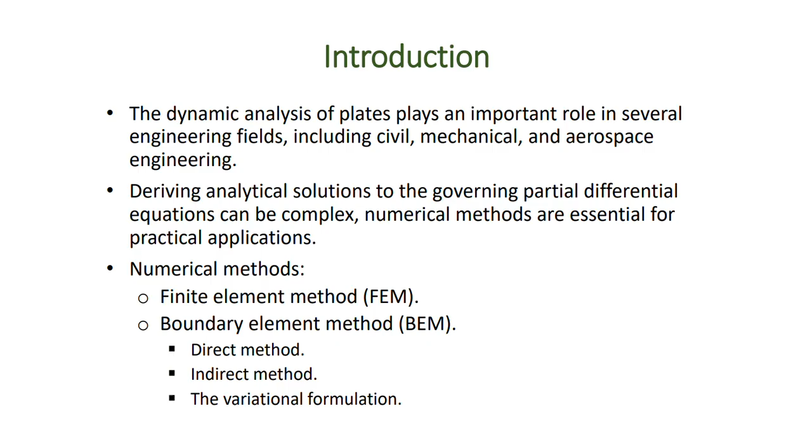There are three types of boundary element method: direct method based on a virtual work principle, indirect method based on the classical superposition, and variational formulation.

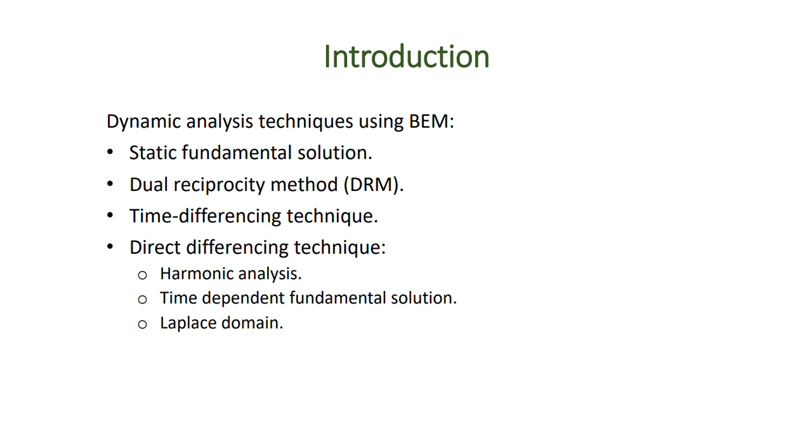There are many dynamic analysis techniques using boundary element method, such as static fundamental solution, DRM, time-differencing technique, direct differencing technique, harmonic analysis, time dependent fundamental solution, and Laplace transform.

The proposed formulation focuses on treating the involved plate as a single element. A boundary integral equation method is used to form stiffness and mass matrices for an arbitrary shear deformable plate in bending using an innovative technique. Hence, those matrices are used to solve the dynamic equation of motion.

This formulation is considered for free and forced vibration. The developed technique involves boundary discretization plus few internal discretization to define mass and measurement points. Several numerical examples are solved to demonstrate the accuracy and the efficiency of the present formulation.

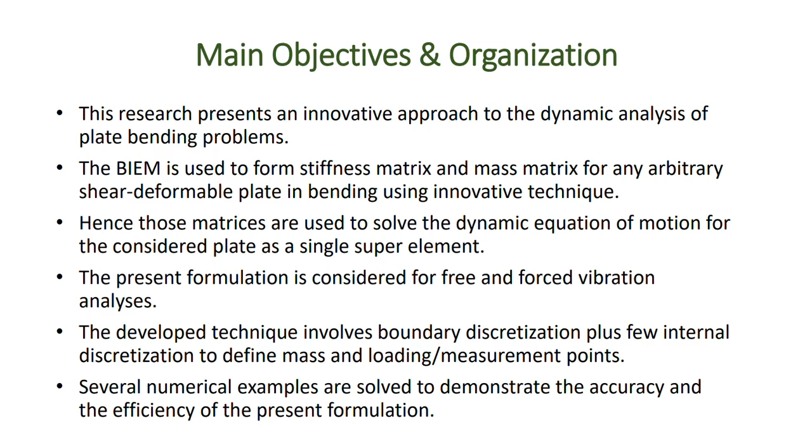To perform the proposed dynamic analysis of plate, it's necessary to extract stiffness and mass matrices using boundary integral equation. This process begins by defining the degrees of freedom inside the plate domain. These degrees of freedom are postulated at least at the loading and the measurement points in case of forced vibration.

Whereas in case of free vibrations, these degrees of freedom are postulated at places where certain modes are desirable to be obtained. Despite these facts, other degrees of freedom are sometimes necessary to have a consistent representation of the plate mass.

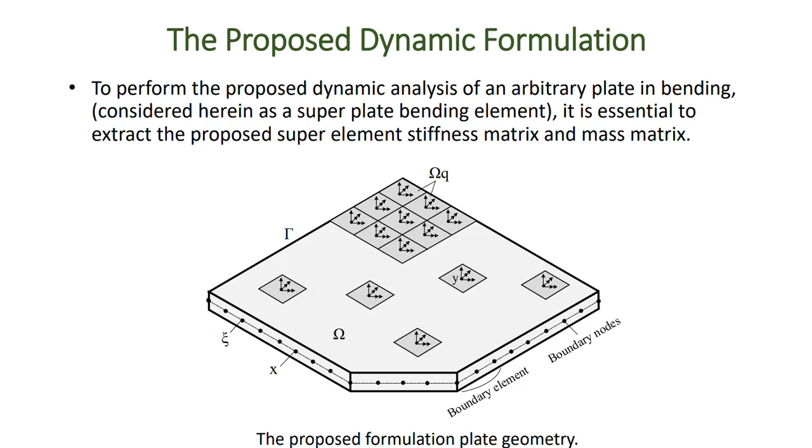Three ways of postulating degree of freedom are proposed. The overall domain is discretized into cells, or part of the domain is discretized into cells, or defining degree of freedom at small cells or points.

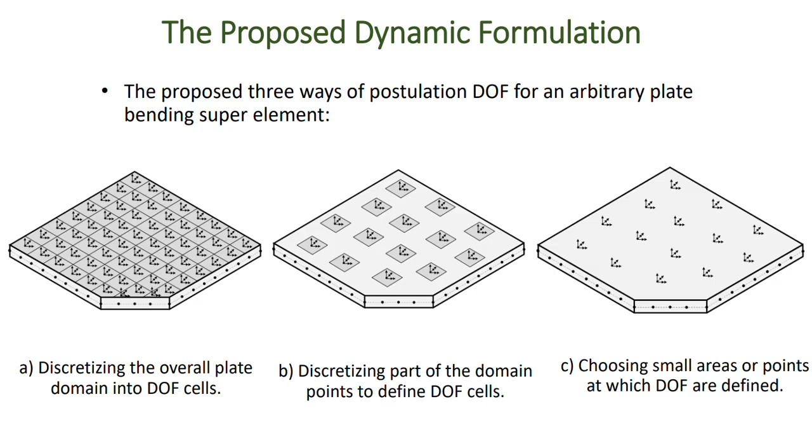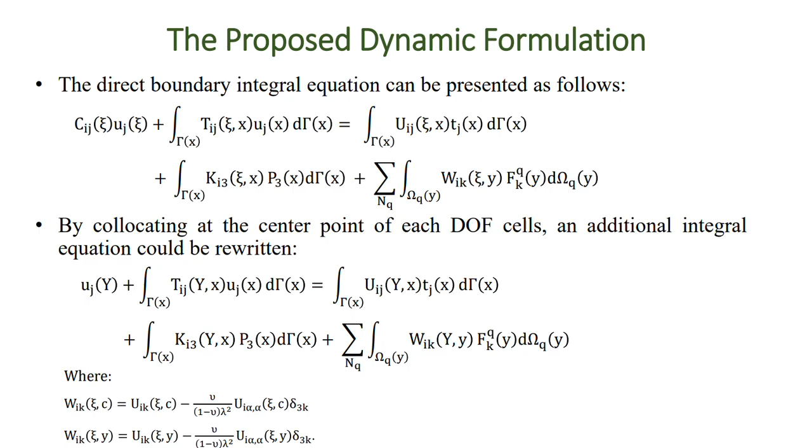This is the used direct boundary integral equation. Noting that at degree of freedom cells, unknown forces will appear, which will later be used to compute the stiffness and mass matrices. Therefore, an additional integral equation could be added by collocating at the center point of each degree of freedom.

It is combined two equations in matrix form to simplify using them.

In order to compute the stiffness matrix, matrix form is used with different prescribed virtual displacement cases. Each case involves applying a unit generalized displacement along one of 3 degrees of freedom at each cell with no domain loading.

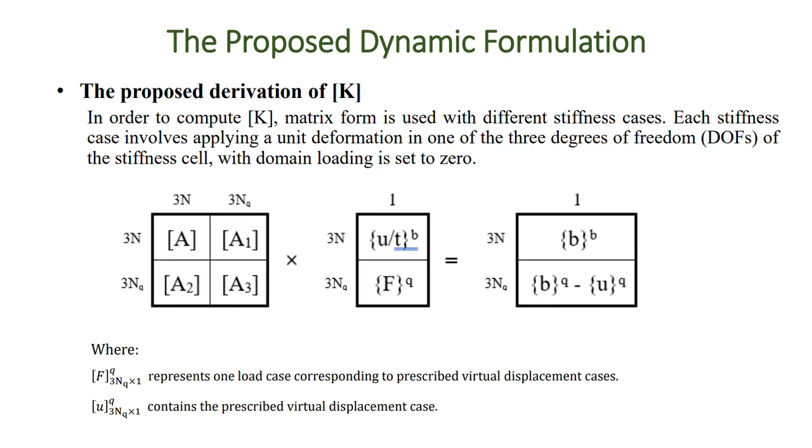By collocating all stiffness cases, matrix form could be written as this. Hence, the stiffness matrix could be computed directly.

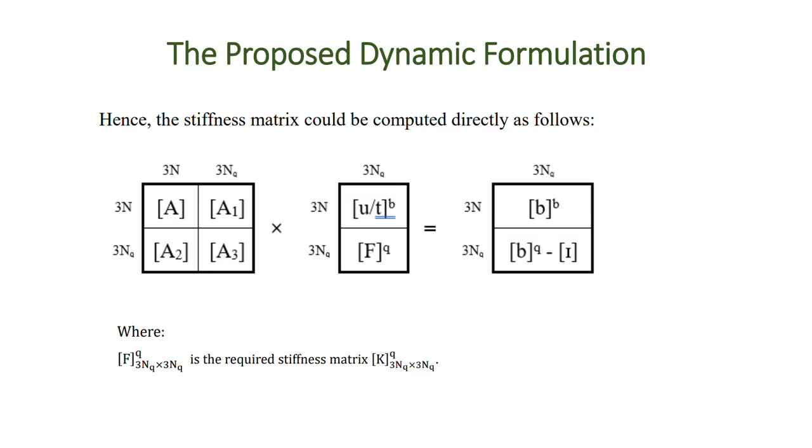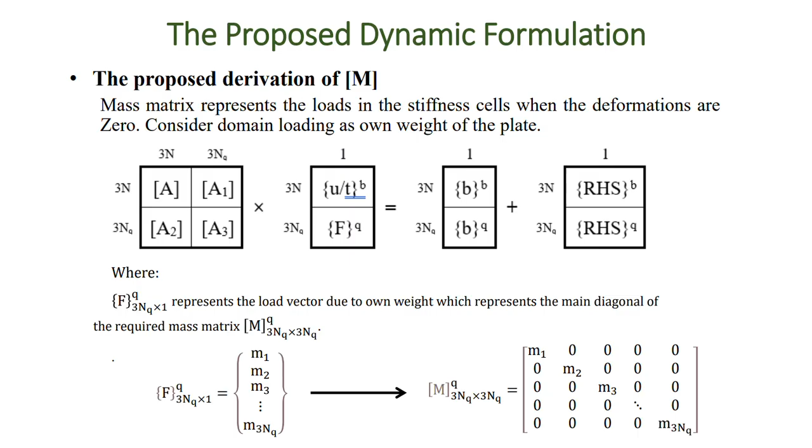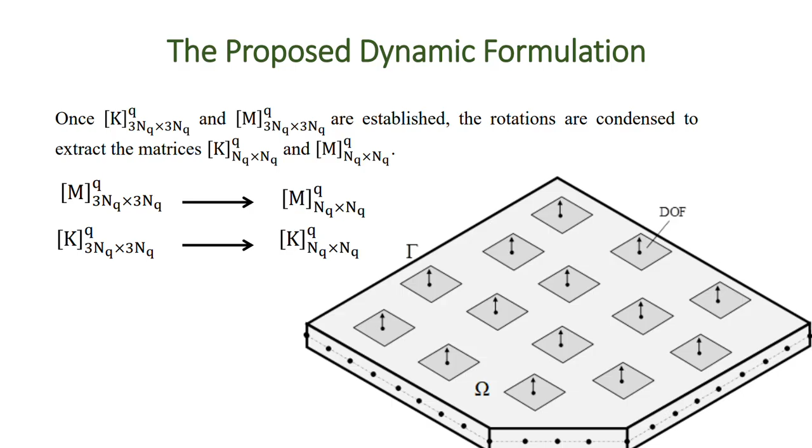To obtain stiffness and mass matrices which are used in the equation of motion, a condensation of rotational degrees of freedom is performed.

After extracting stiffness and mass matrices, equation of motion could be solved. To perform free vibration analysis, the eigenvalues are computed and then frequencies can be determined.

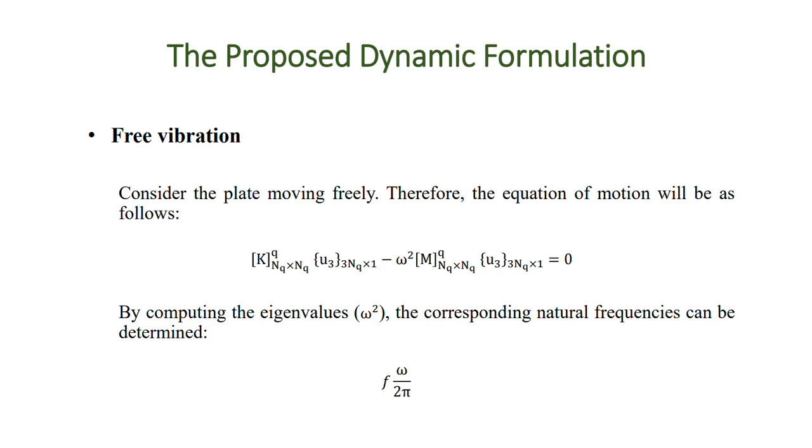To perform forced vibration analysis, a Houbolt scheme is used to determine the time history of the vertical displacement at any point on the plate.

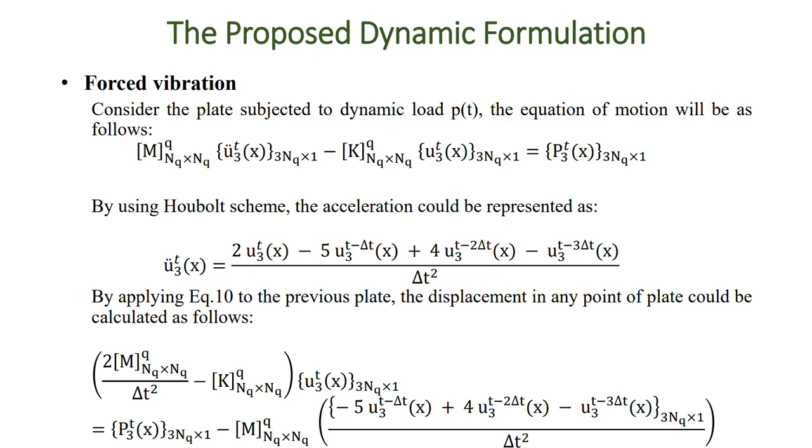Based on the proposed formulation discussed, a flowchart has been created to illustrate the solution procedure. Initially, extracting stiffness and mass matrices, then condensing the rotational degree of freedom. Finally, using the equation of motion to perform dynamic analysis.

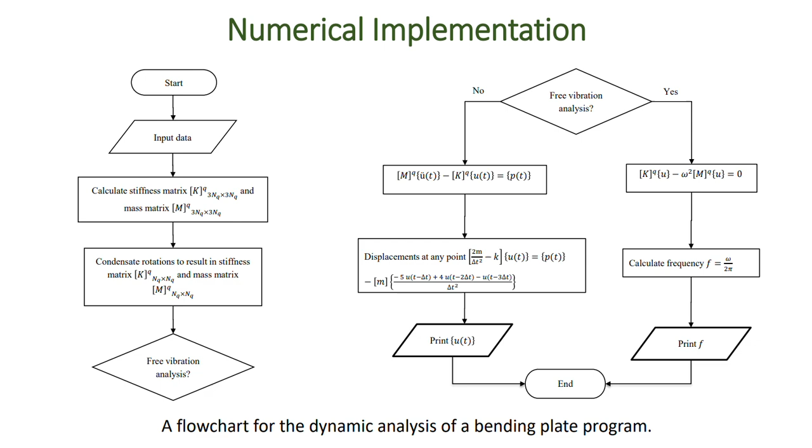In case of free vibration analysis, eigenvalues are computed, but in case of forced vibration analysis, the Houbolt scheme is used to extract the displacement curve for any point over time. A series of numerical examples are solved to demonstrate the effectiveness of the present formulation.

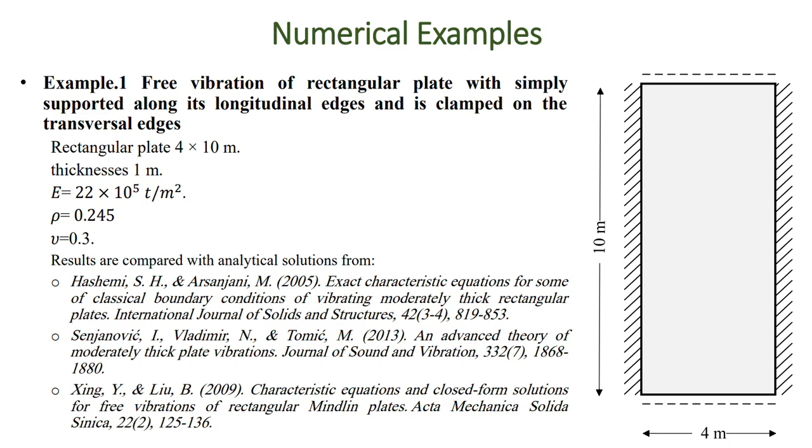Example 1: free vibration of a rectangular plate, simply supported along its longitudinal edges and clamped on the transversal edges. The results of this problem are compared with analytical solution, finite element method, thick plate, or 3D finite element method. It can be seen that the present formulation results demonstrate better agreement than those of the finite element method compared to the analytical solution.

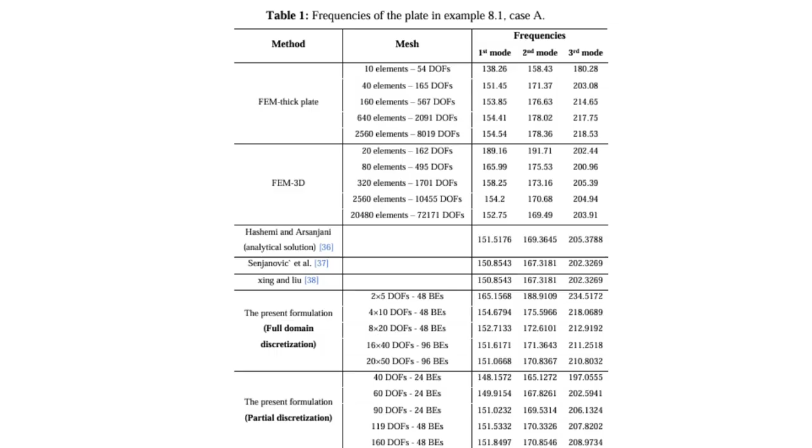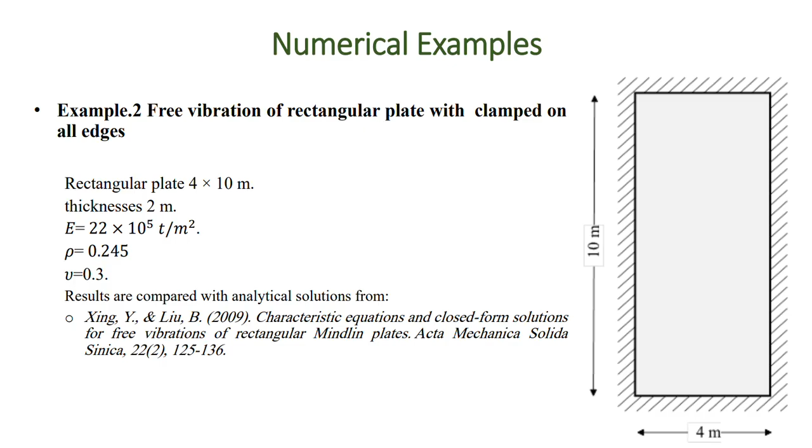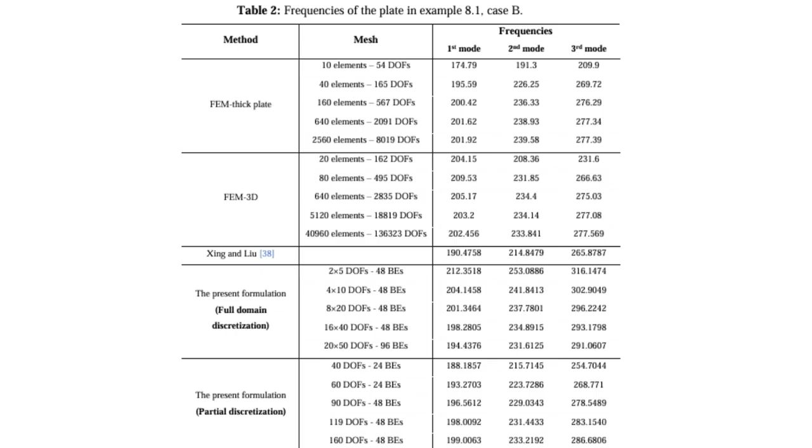Example 2: free vibration of a rectangular plate clamped on all edges. Results of the problem are compared with the analytical solution, finite element thick plate, and 3D finite element method. The results obtained from the present formulation are in good agreement with those obtained from the analytical solution. This demonstrates that the present formulation remains accurate for both thin and thick plates.

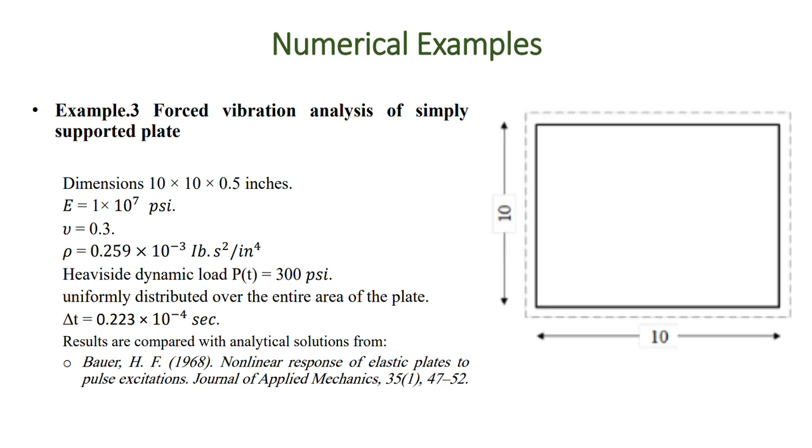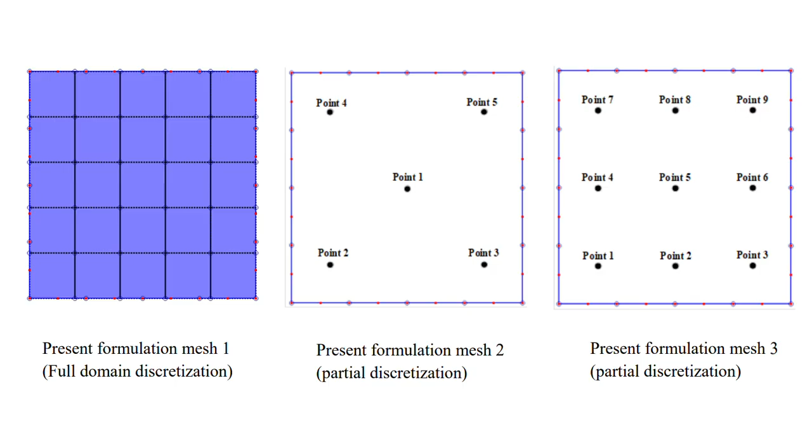Example 3: forced vibration analysis of a simply supported plate subjected to a Heaviside dynamic load uniformly distributed over the entire area of the plate. The results are compared with analytical solutions. Three meshes were used, one with full domain discretization and two with partial discretization. It can be seen that the results are in excellent agreement with the analytical solutions.

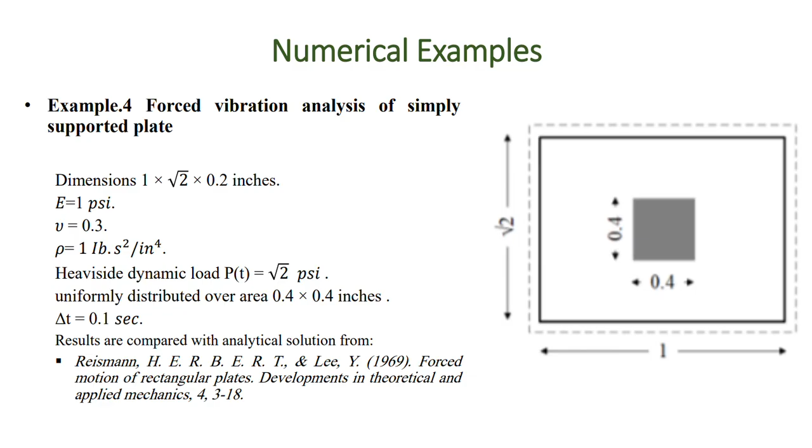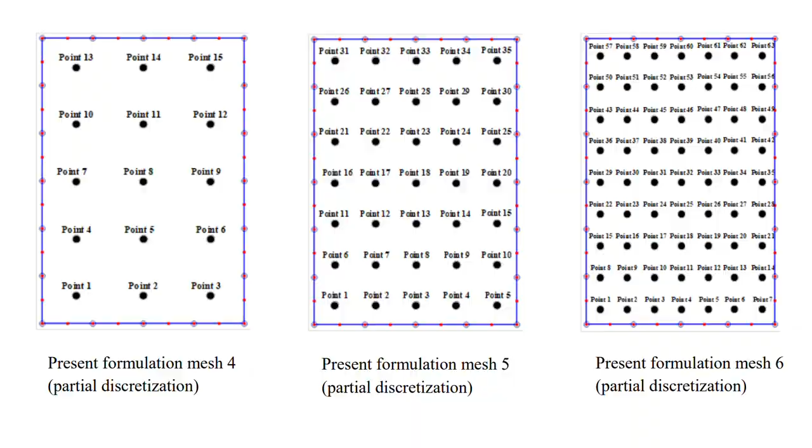Example 4: forced vibration analysis of a simply supported plate subjected to a Heaviside dynamic load uniformly distributed over an area of 0.4 by 0.4. Results are compared with analytical solution. Three meshes with full domain discretization and another three meshes with partial discretization were used. These results demonstrate good agreement with the analytical solution.

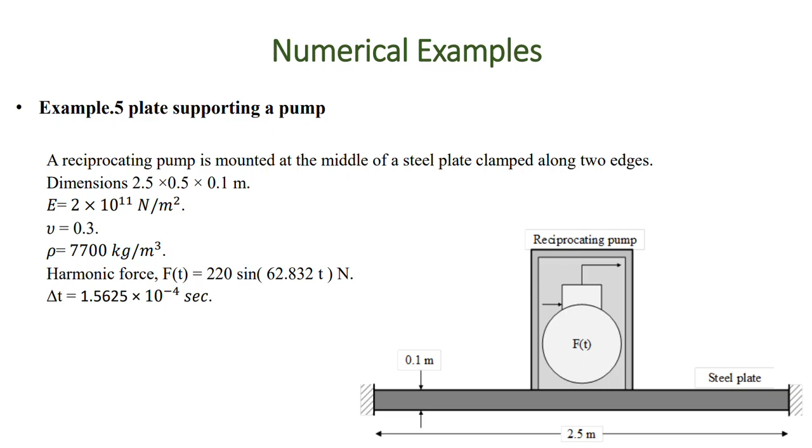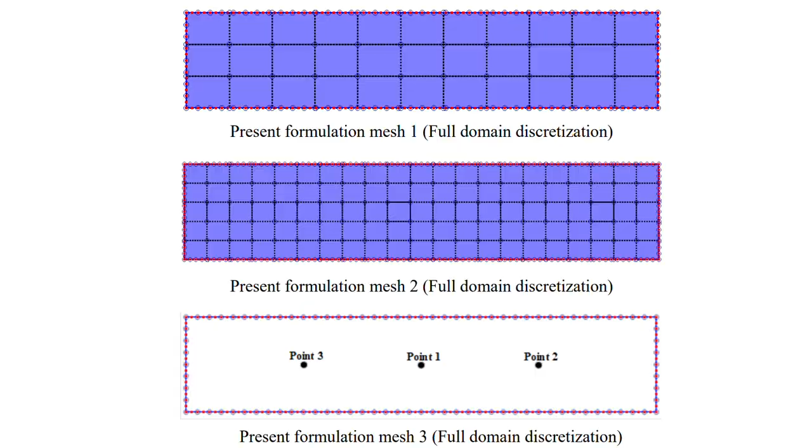Example 5: a reciprocating pump is mounted at the middle of a steel plate clamped along two edges, subjected to a harmonic force. The results are compared with the finite element method. Two meshes with full domain discretization and one mesh with partial discretization were used. The results from the present formulation are very close to the results of the finite element method.

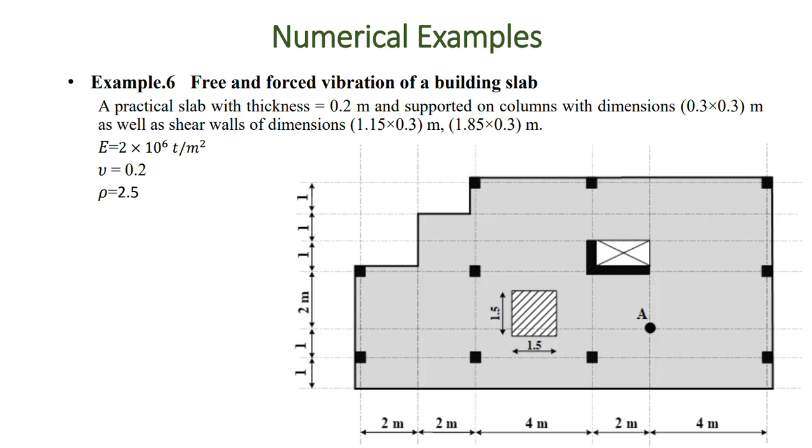The former examples demonstrated a verification of the present formulation. In this example, a practical slab is solved and the results are compared with the finite element method. A set of full domain discretization meshes and partial discretization meshes were used.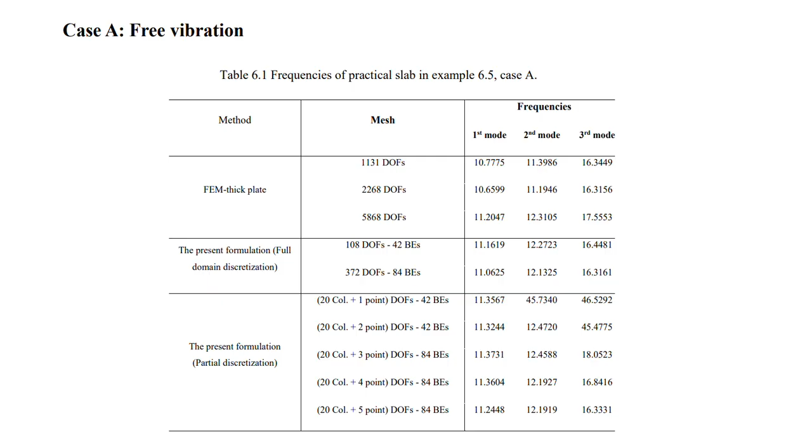In case of free vibration analysis, the results demonstrate the validity and efficiency of the present formulation in comparison with the finite element method. But in case of forced vibration analysis, the slab is subjected to a dynamic load applied on the hatched area. It's observed that the results from the present formulation are almost identical to the finite element method, even when using only a few points instead of dividing the entire domain.

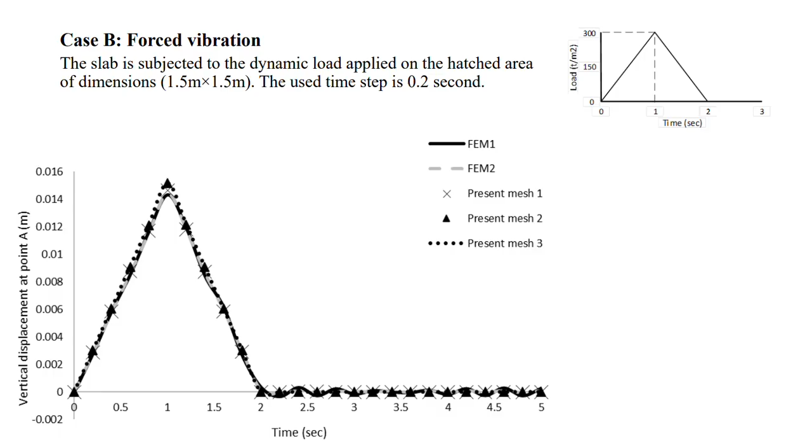Based on the former examples, it is concluded that the proposed formulation is well suited for analyzing both free and forced vibration. In this formulation, it's not essential to discretize the entire domain into cells. Instead, it's sufficient to use a limited number of points.

The results obtained from the present formulation are in good agreement with analytical solutions compared with the finite element method. It requires less computational effort while providing higher accuracy than other numerical methods, as accurate results can be achieved without the need for a large number of degrees of freedom. This formulation is suitable for practical slab structures without requiring huge computational effort.

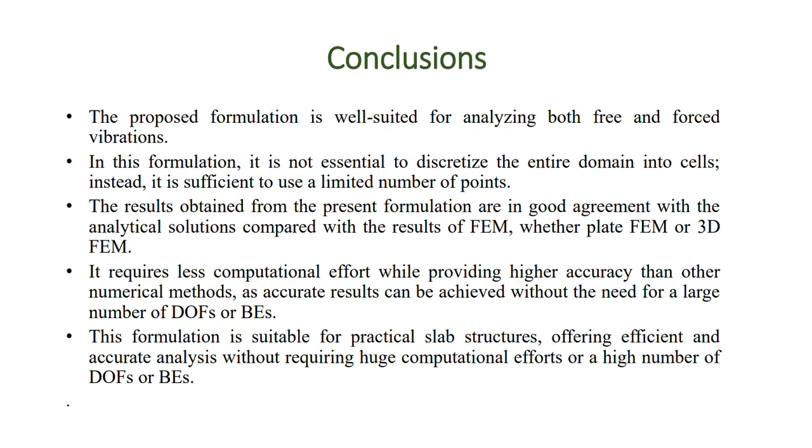This formulation can be effectively used in other fields, opening up new research areas. For example, dynamic analysis of post-tension slabs, walking vibration analysis, automated selection of representative mass points to improve usability and reduce modeling effort.

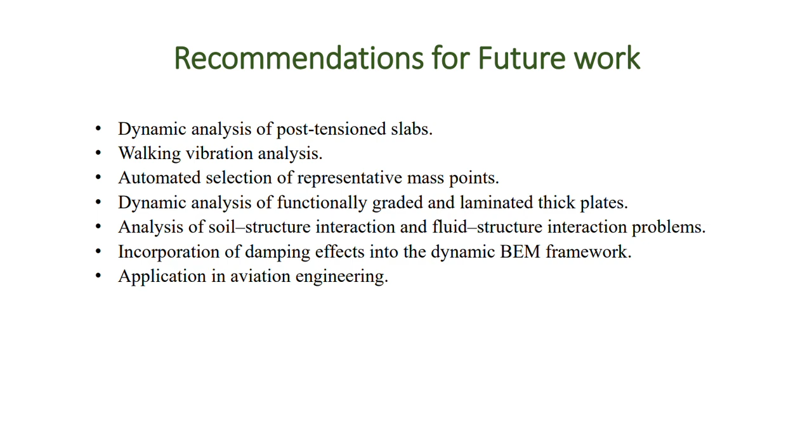Dynamic analysis of functionally graded and laminated thick plates, analysis of soil-structure interaction and fluid-structure interaction, incorporation of damping effects into the dynamic analysis, and application in aviation engineering, such as the dynamic analysis of functionally graded wing structures.